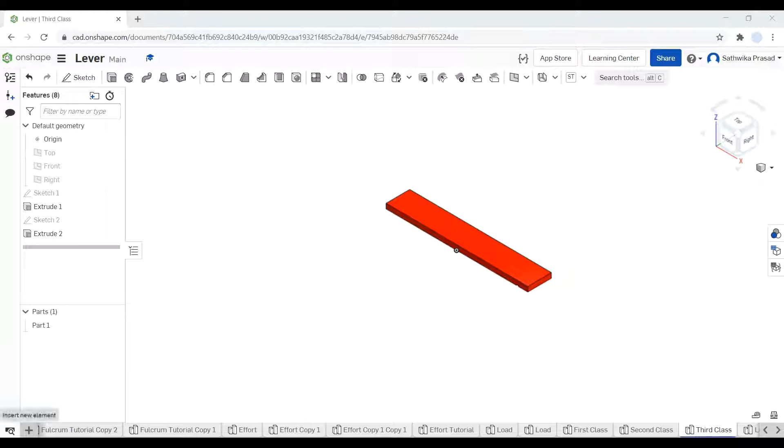I'm going to create my first part studio, another part studio, and I'm going to rename it first class lever.

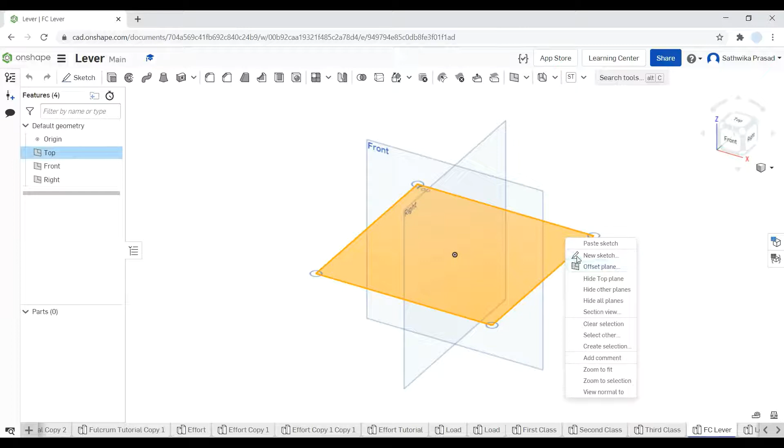For first class lever, I'm going to right click and make a sketch on my top plane. So how I did that was I went to my top plane, right clicked, and clicked on new sketch.

There I got view normal sketch plane. Then I'm going to go to corner point rectangle. My workspace is in millimeters, so if you haven't changed your workspace to millimeters yet, please do. I'm going to make my rectangle.

It can be very rough, it doesn't need to be perfect. So then I'm going to dimension my rectangle. I'm going to make the dimension 150 for this long side, and the short side to be 25.

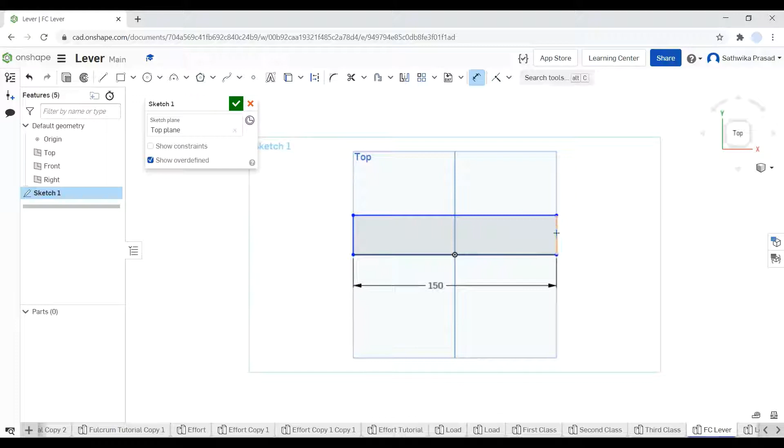The reason being, we want our rectangle to completely fit the fulcrum point.

So now I'm going to click the green check button. I'm going to extrude my sketch and make the extrusion 5 millimeters. Make sure you're in new. Click the green check button to confirm. Go into isometric view to make sure the extrusion was done.

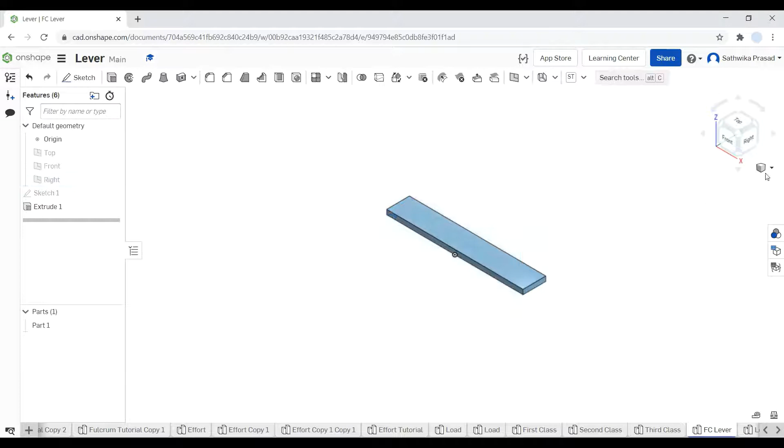So now I'm going to hide all of my planes by coming to the Features tab and hiding all of my planes. Then I'm going to go to my front plane and make a sketch here.

I am going to go to my arc tool. I'm using a 3-point arc. I'm going to go from a little away from the center point all the way to the other side, just making sure I draw my arc.

Then I'm going to come to my coincident constraint. I'm going to select these 2 points and align them. Then I'm going to dimension my arc to 1 millimeter.

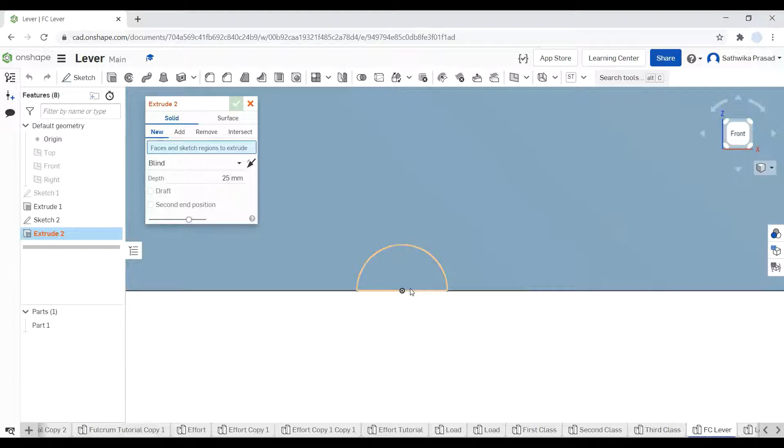Then I'm going to confirm my sketch. I'm going to zoom in, select extrude, select my arc. Make sure you're selecting only the orange part. Then you're going to click remove.

Go to your blind dropdown and click through all. Click the green check and go into isometric. And there you have it, you've created your first class lever handle.

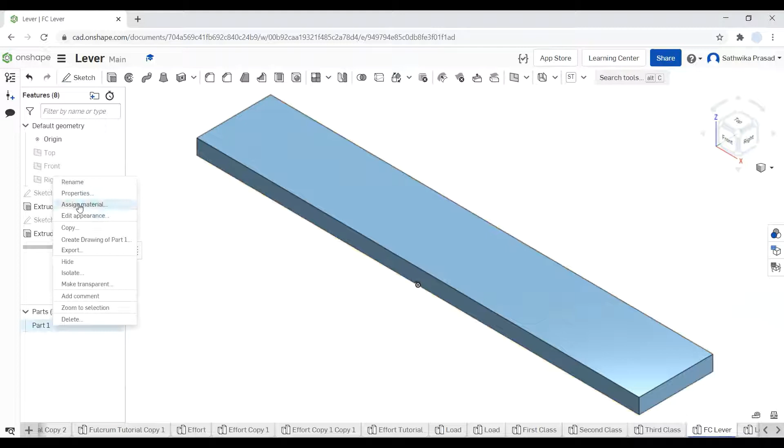Now I want you to right click in your parts, go to edit appearance, go to red, and click the check button. There's your first class lever.

Then I'm going to create a new part studio. Actually, first I'm going to delete my example. Then I'm going to add another part studio, and I am going to do very similar things.

So I'm going to right click, make a new sketch, and set to view normal sketch plane. Then I'm going to create my corner rectangle.

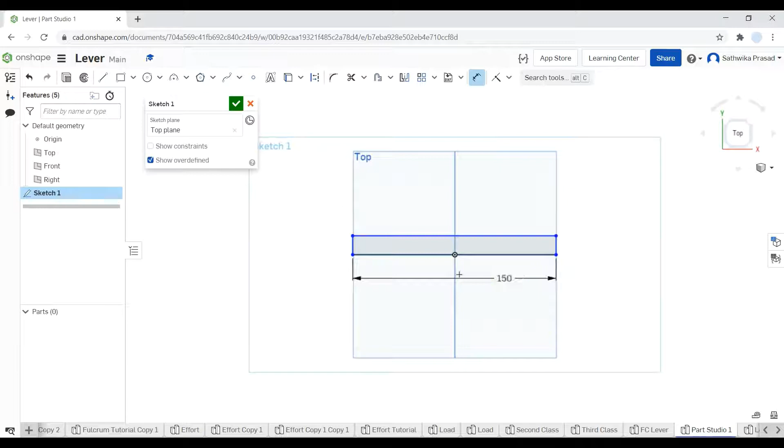Voila. Okay, now I'm going to dimension it to 150, 25. Then I'm going to click escape, check, and I'm going to go to extrude.

I'm going to extrude it for 5 millimeters. Oops. So come to your extrusion, make sure you're in new, go to 5 millimeters.

Click the green check, go to isometric, and make sure your extrusion has been completed.

Then I'm going to go into front view, go to the side, come to the side a bit, zoom in, and make a sketch by coming to the sketch button.

Then I'm going to draw my arc over here, making sure that my arc center point is coincident to the line. I'm going to then dimension this side to this side.

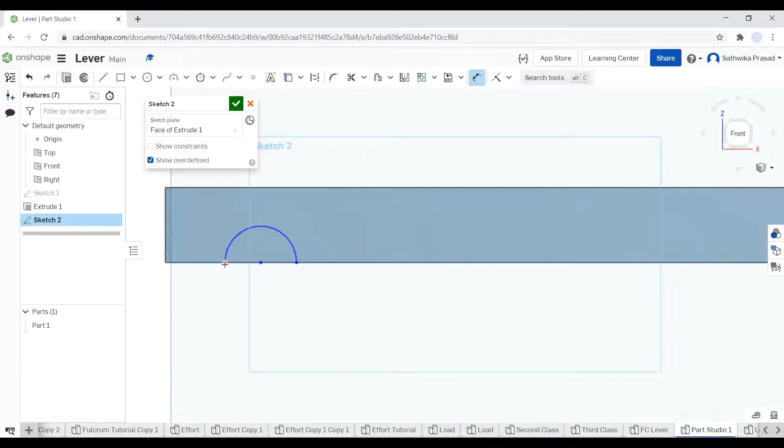I'm going to make it 10 millimeters, and the dimension of the arc is going to be 1. I'm going to click the green check button.

I'm going to go to extrude, make sure you're in remove, go through, click through all in your drop down, click the green check, and there you go.

This is when I go, then come down to your bar, right click, rename, and label it second class lever.

Then delete. I'm going to delete mine because I made an example again.

Then I'm going to go create a new part studio. Oops, actually before, don't do that.

Come to your part, right click, click on edit appearance, come to your red, click on the green check, and there you have it. Or actually, no, go right click on parts, click edit appearance, and make sure you choose a different color. I made the mistake there, otherwise you're going to get confused with which lever is which one. So I'm going to choose a nice greenish shade.

So I'm going to choose this one for my second class lever. Then I'm going to create a new part studio.

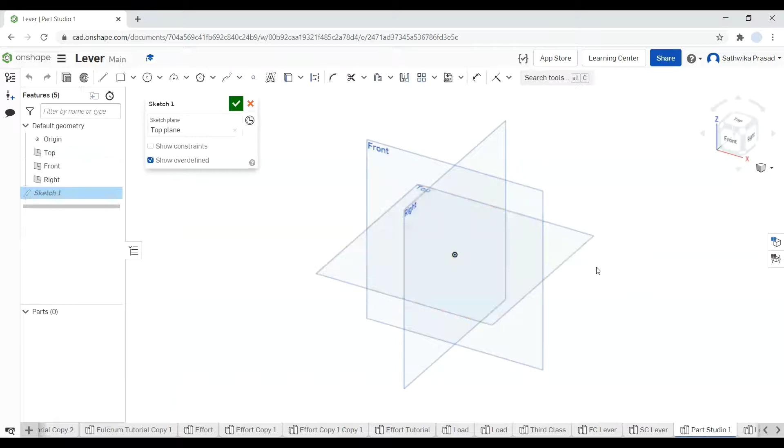Then what I'm going to do is I'm going to come to the top plane, right click, new sketch, come to my top plane, go click on corner of rectangle.

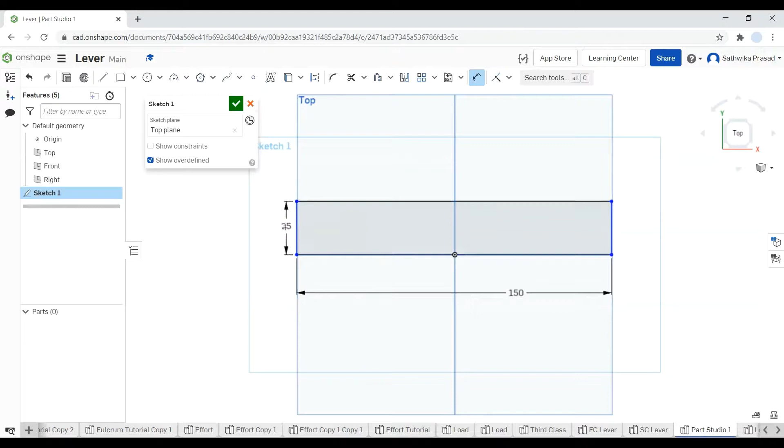Again, just repeat the steps. Draw your corner rectangle, come to dimensions, dimension it to 150, dimension your second side to 25, click the green check, then extrude for 5 millimeters, and then come into isometric.

Go to front, zoom in on your right side, and now I'm going to try something new. I'm going to first actually click on my arc.

I'm going to make it way farther and much bigger. Then what I'm going to do is I'm going to dimension it to 1.

Then what I'm going to do is I'm going to dimension this point to this line, and then I'm going to do 10.

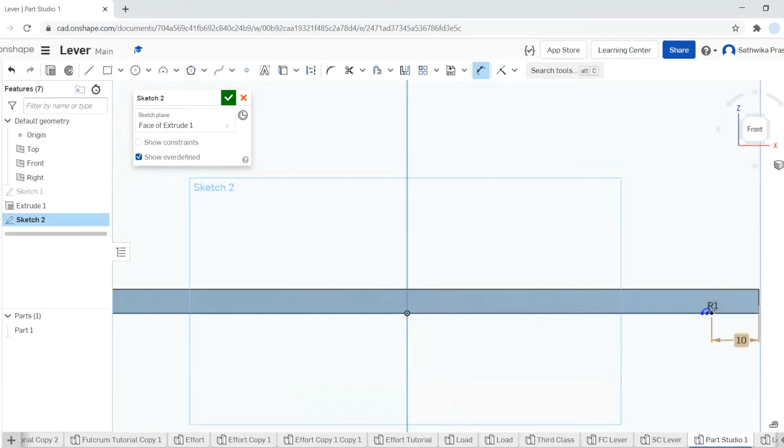Yay! There we go. So when OnShape glitches, always try it in a different way. Always maybe switch the order and what dimensions you're doing because OnShape may just act up there.

Then I'm going to click on the green check, and then I'm going to extrude. I'm going to select my semicircle and go to remove. I'm going to make sure that it's through all. I'm going to click the green check and there we go.

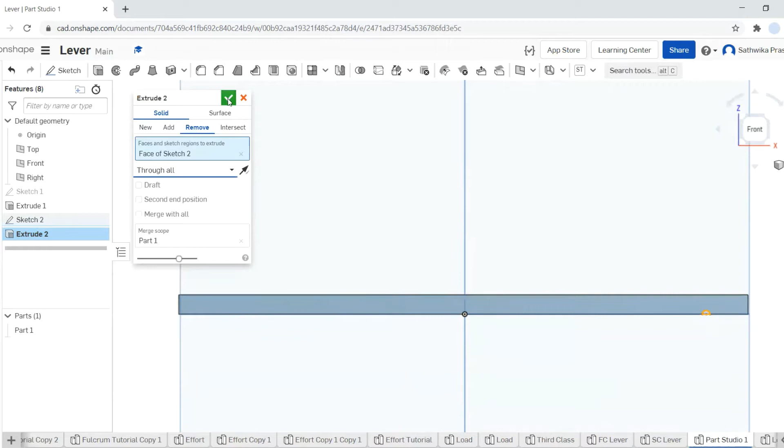Now finally what I'm going to do is I'm just going to change my color. I'm going to right click, then edit appearance, and I think I'll choose a nice yellow color this time. It's not that yellow. Then click my green check, delete my third class example, and that's it for this video.

So let me just hide all of the planes to show you what that looks like. In isometric, this is how it looks.